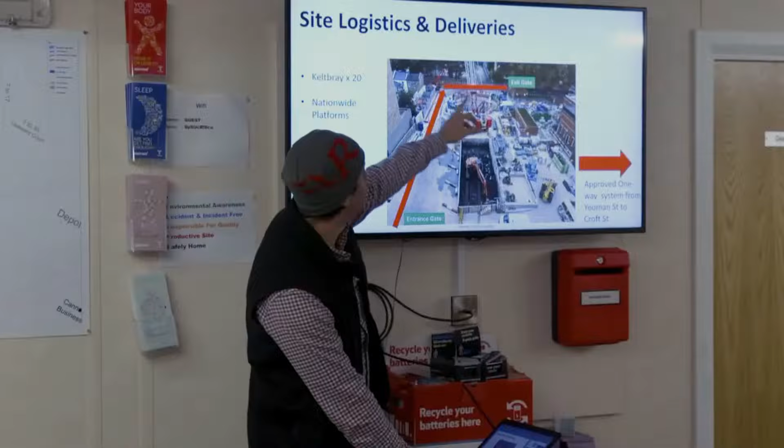Welcome to this overview of the Transforming Tunnelling Safety Group. Originally formed via interested client organisations who wanted to drive step change in the health, safety and wellbeing of the tunnelling industry. Safety standards and performance have improved considerably over the decades, but the Transforming Tunnelling Safety Group wants to help deliver a further positive shift in performance.

Free access to TTS content and resources is kindly hosted on the British Tunnelling Society's website. This video provides guidance on accessing the content, the benefits of doing so, and how you can contribute to further improve our web pages. The Transforming Tunnelling Safety Group provides safety videos, relevant health, safety and wellbeing alerts, good practice guides and proposals, as well as other useful information for the industry.

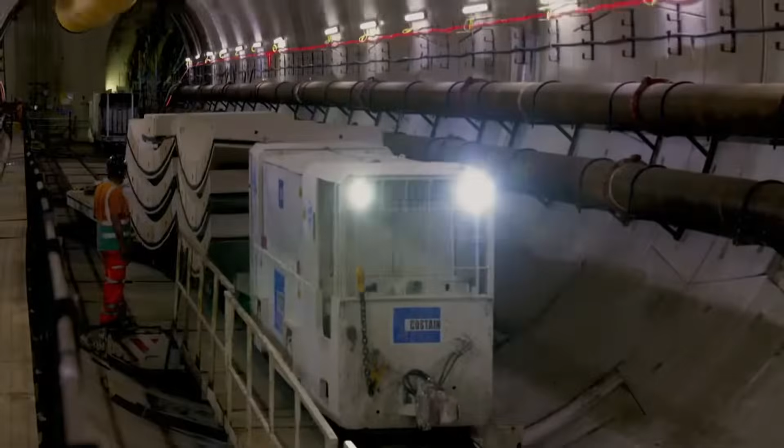This has all been supplied by previously successful tunnel projects. We really encourage members to use this content with your workforce briefings so that we can all improve health, safety and wellbeing performance. In addition, we encourage members to submit content based on your experiences, skills and lessons learned in the field. Through this collaborative way of working, we can make the tunnelling industry safer and healthier for everyone that works in it.

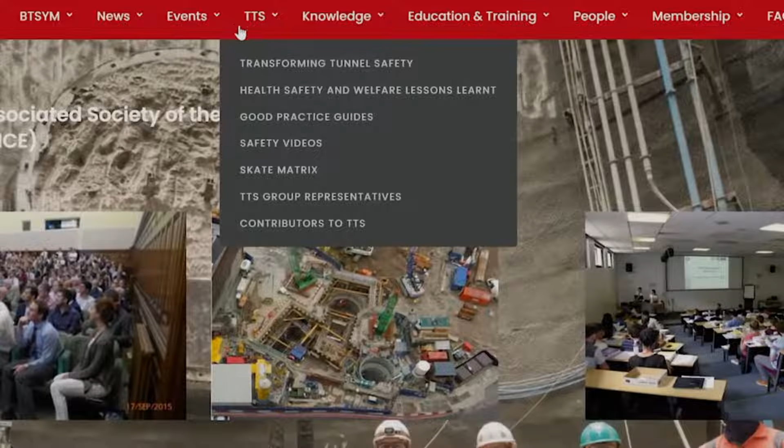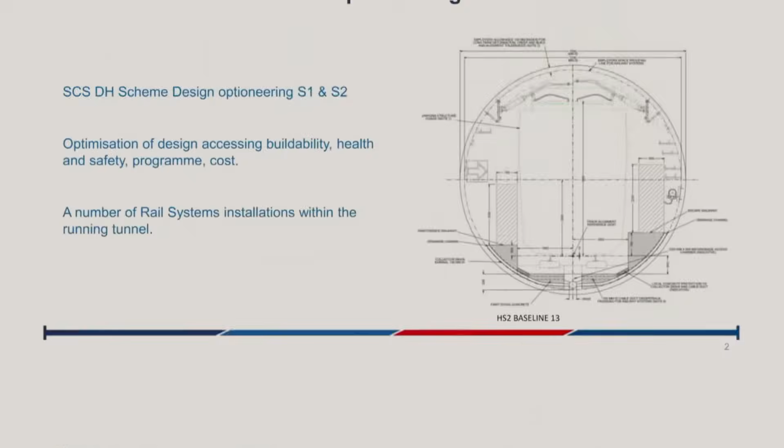Accessing the content via the British Tunnelling Society website couldn't be easier. Simply select the TTS shortcut on the homepage or the red quick links bar. From here you can access a number of resources, including real-life lessons of health, safety and wellbeing incidents, a range of good practice guides. These have been researched, developed and published by individual organisations or projects. You may find them to be useful references when planning your works. A range of safety videos, contact details for TTS representatives, and our SKATE matrix.

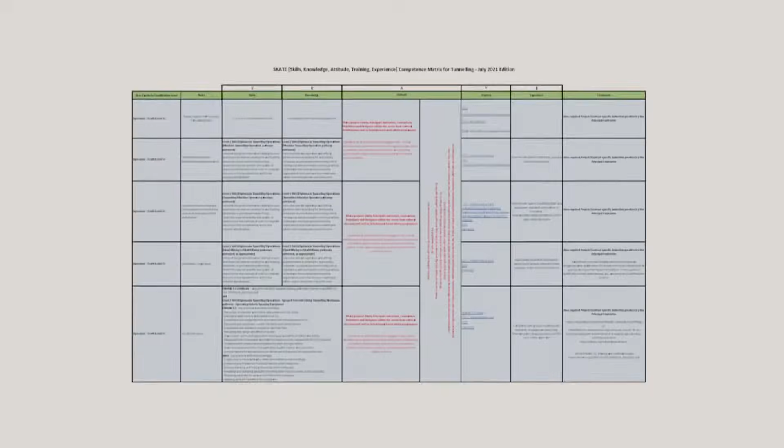The matrix was developed to be used by clients, contractors, and employers to define competence and improve safety and productivity on tunnelling projects. Updated annually with feedback and inputs from the sector, the matrix clarifies the skills, knowledge, attitude, training, and experience required for most occupations within the industry.

Videos are an excellent way of engaging the workforce. All our safety video content has been submitted to the Transforming Tunnelling Safety Group by industry-leading organisations. Considerable investment has been made to create impactful videos that cover key risks and outcomes. The video was very easy to find on the website, and when I played it to the workforce and everybody in the room, they were really engrossed in it, and you could literally hear a pin drop when we were playing it. My name's Lawrence Denman.

Watched the safety video this morning, thought it had a really good visual impact, and you're going to remember it when you go outside. We encourage everyone in the tunnelling industry to submit resources to make the website better, and you can do so via the Submit Content to TTS Here link on the homepage. All content is vetted before becoming available for members to use.

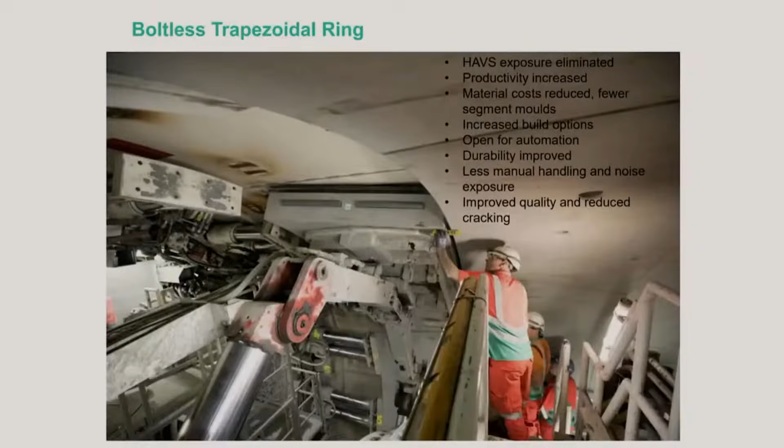And for organisations that submit content, the logos will appear in the contributors section of the website, so everyone can see who the leading organisations in the industry are. By industry members submitting content, the website will become even more relevant and beneficial.

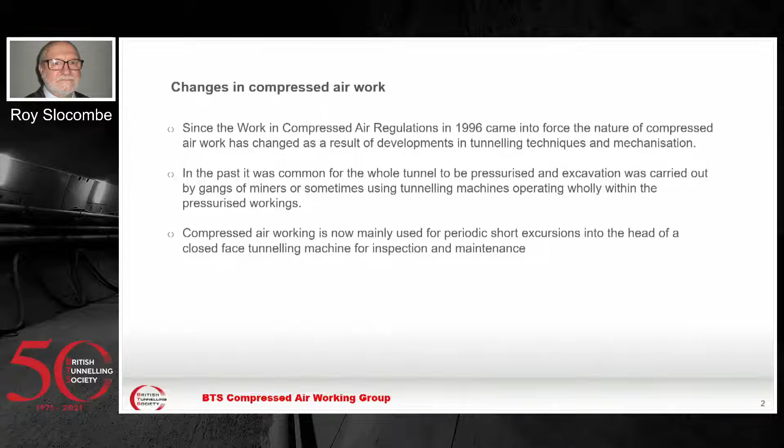The developments in machine technology over the years have also allowed tunnels to be done deeper with much higher pressures. This in turn meant that you're looking at much higher working pressures for face access, and that's led to the introduction of higher pressure working techniques developed for the offshore diving industry, including the use of non-air breathing or mixed gas mixtures rather than just natural air. That hasn't been done much as yet in the UK, but it has been done quite extensively overseas.

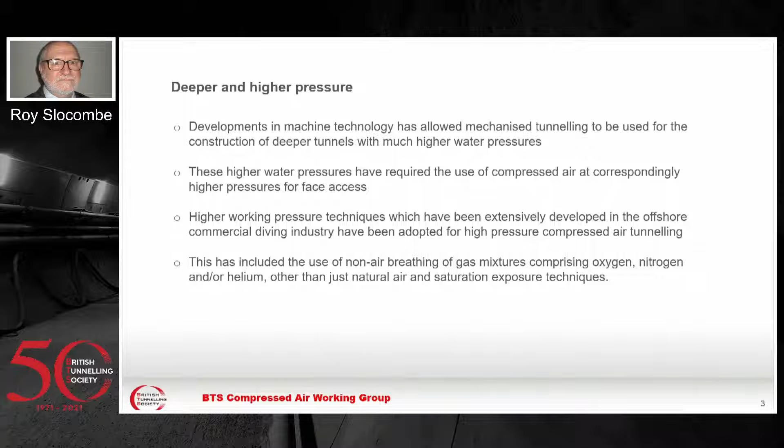That's also led to this clarification of definitions, because low pressure areas still work at low pressures that don't need a stage decompression. With current guidance, that's below 0.7 bar gauge. All the pressures we talk about are gauge pressures, because we're all sat here at 1 bar absolute now. We always talk about gauge pressures, so just pressures above atmospheric. Intermediate pressure is a definition that's now introduced, because that's work above 0.7 bar that needs a stage decompression, but is still below the 3.5 bar limit, which was the statutory limit.

It's still a statutory limit in the UK, but it's recognised that by applying for exemption, this will be forthcoming to allow work at higher pressures.

The latest version of the guidance now includes quite extensive guidance on work at pressures above 3.5 bar, which is something Donald will comment much more on. It also includes changes, because over the years there have been a number of changes within the European standards and British standards, which are referred to in the document or interface with it.

The guidance is primarily drafted for use in the UK, by the BTS, but we know it's often used elsewhere in the world, especially where there isn't or there's a lack of local regulation. That's something members of the group can be justifiably proud of, that the experience they bring to the guidance is recognised overseas.

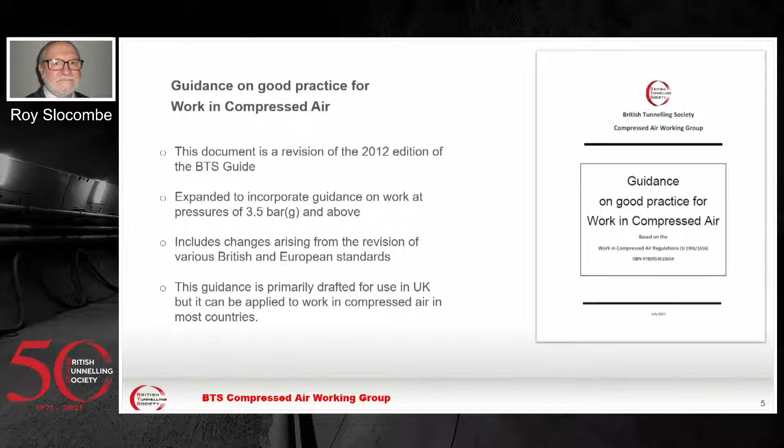Other relevant documents, these are ones that mesh together. 6164, health and safety in tunnelling, that's very relevant. The next two are mainly European standards, or the BS harmonisation thereof.

16191 covers a lot of the machinery requirements, more on the shields and the rest of the equipment. 12110 is specifically airlock safety requirements, mainly aimed at airlocks, which are an integral part of the structure of the TBM, but most of the guidance can still be applied in other situations.

The last one, the ITA Client's Guide to High Pressure Work, was prepared a couple of years ago because it was recognised that whereas most of the responsibility, if not all the responsibility, for actually using compressed air will fall to the tunnelling contractor, often it's good that the client at an early stage can anticipate the use of compressed air, and more importantly, not do anything that will then cause a problem later.

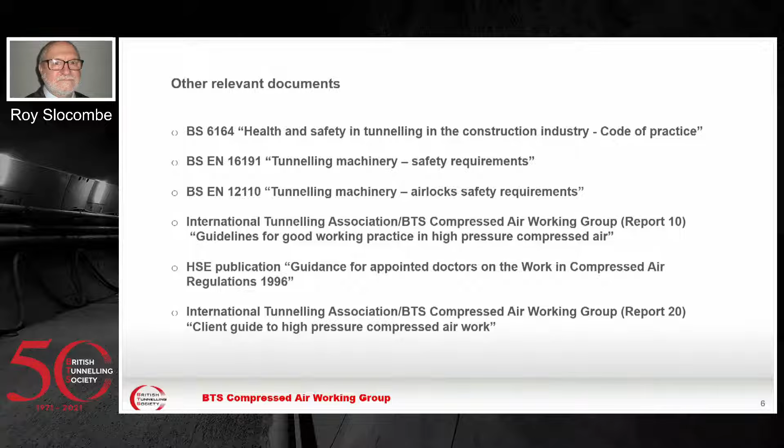12110 is being revised at the moment. Several of the changes incorporated into the compressed air guidance will also be incorporated into 12110. Once the new revision of 12110 is published, that will take precedence, but for the time being there's some interim guidance included.

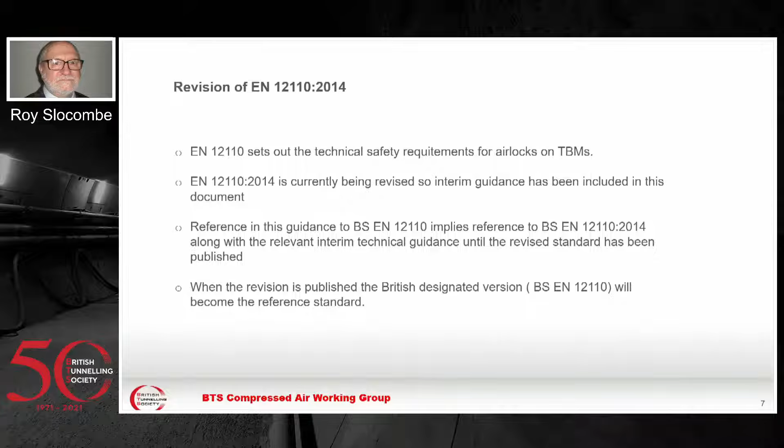As we say, that's ITA Report 10. We were very pleased that they acknowledged the input from the Compressed Air Working Group with the addition of the BTS logo on the front cover. We always think that's good. It helps to raise the international profile of the Tunnelling Society, which we think is quite good.

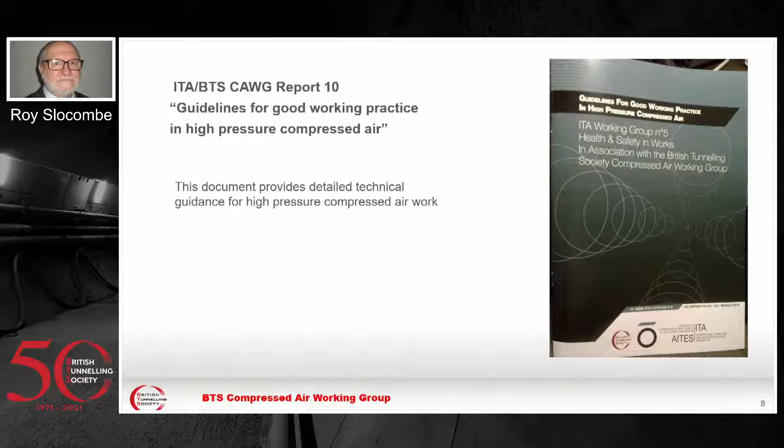Compressed air contractor - it's recognised throughout that the compressed air contractor is a bit like the principal contractor of the CDM, has the major role in pulling everything together, and has the general responsibility for the work in compressed air. They consult with the relevant specialists, which again is set out in the document, on how this guidance works in to help him with his decisions.

The one change that has happened over the years is that a few years back they actually withdrew the requirement to use approved procedures. In previous guidance, the 96 regulations, there were tables set out, and if you wanted to use a different decompression table you had to apply for an exemption. Even if you wanted to use a table which everyone agreed was more conservative and therefore better, you still had to apply for an exemption.

But they no longer want to approve procedures, and therefore it's left to the compressed air contractor in conjunction with his specialist to select appropriate procedures for decompression as part of the safe system of work. The HSE retained the requirement for an exemption for work above 3.5 bar, and that's recognition there's a lot more preparation and consideration to be given for this.

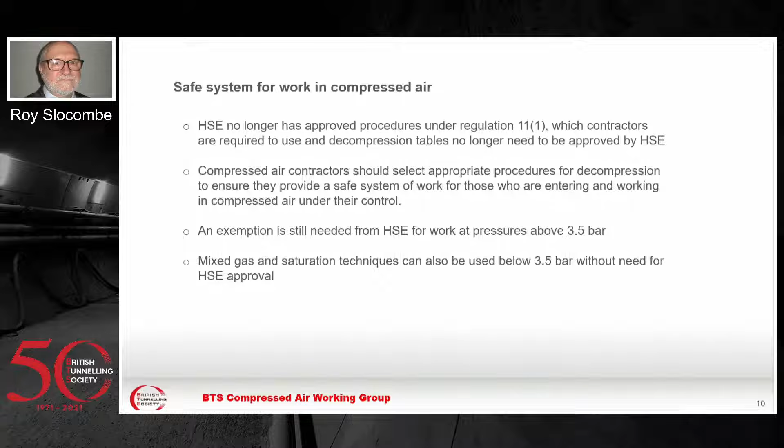Quite a number of changes with the plant and equipment, and again, although it's generally talking about airlocks on a tunnelling machine, the requirements about furnishing the locks and the equipment are equally applicable if it is a tunnel lock or a boiler lock on a bulkhead.

The one thing we did look at for consideration is the prospect of having sufficient storage of compressed air, so no matter what mayhem happens back out in the tunnel, you can still safely decompress the people. If it is a fire or anything else, you can then decompress them safely and get them into the refuge. Because at the end of it, all the guidance and requirement is aimed at safe working and looking after the safety of the guys working in compressed air.

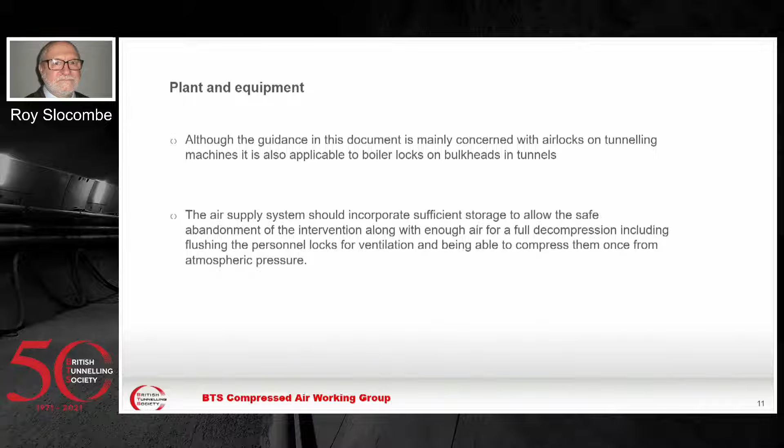The intermediate chamber, on a lot of big machines it's already there, but this is emphasising the requirement so that there's somewhere between the working chamber or excavation chamber of the machine and the airlocks. Where mixed gas is being used, there's another place where that's fed through to the working chamber, so the guys have a dirty working area to change into clean overalls before going into the airlock, especially if it's a lengthy decompression.

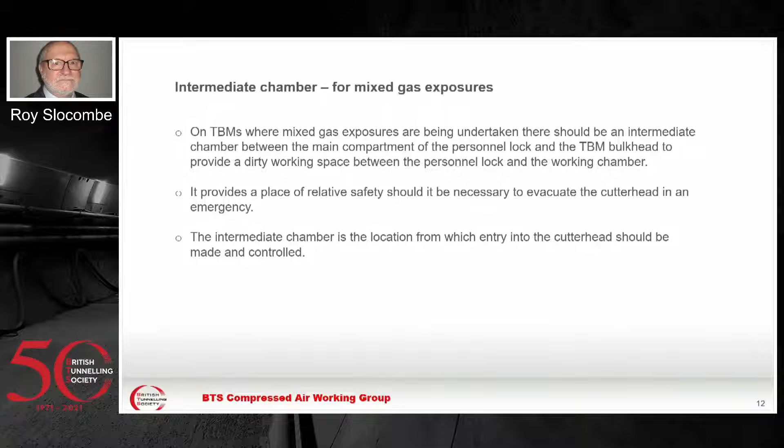Oxygen is another thing that was clarified. It had always been accepted, and in risk assessments or method statements, that if someone suffers a severe decompression illness immediately on coming out of the airlock, the practice would be to recompress them. We're clarifying here the requirement that will also be in 12110, that the whole system should be capable of working at 1.8 bar gauge, to allow a US Navy Table 6 therapeutic recompression, which seems to be a worldwide standard for therapeutic recompressions.

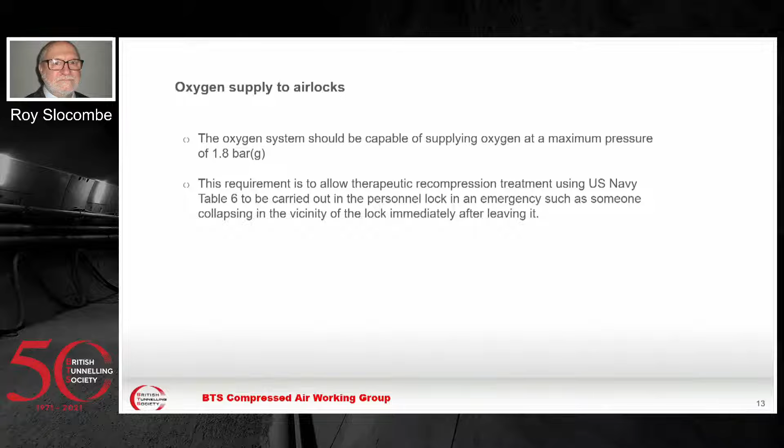Surface habitat, Donald might mention a bit more on that, this is very new because this only comes in if we are looking at saturation diving techniques, so that people are living under pressure in a surface habitat for 14 or 28 days and then making excursions under pressure to do the maintenance, rather than compressing and decompressing after every visit. It's seen as quite beneficial for working times, but also from the health and safety of the people, since they're only having one very slow decompression instead of a decompression after every visit. So when we talk about much higher pressures, this is a benefit to all concerned.

At the moment there isn't a standard, either British or European, for habitats. This is likely to be forthcoming, but in the meantime the requirements are in EN 12110 or BS 12110, and this guidance is good guidance to be followed.

Similarly, the transfer under pressure shuttles, that's something that only comes in if you're using saturation techniques. This is effectively a mobile pressure chamber that transfers the workers from the surface habitat to the working chamber on the shield.

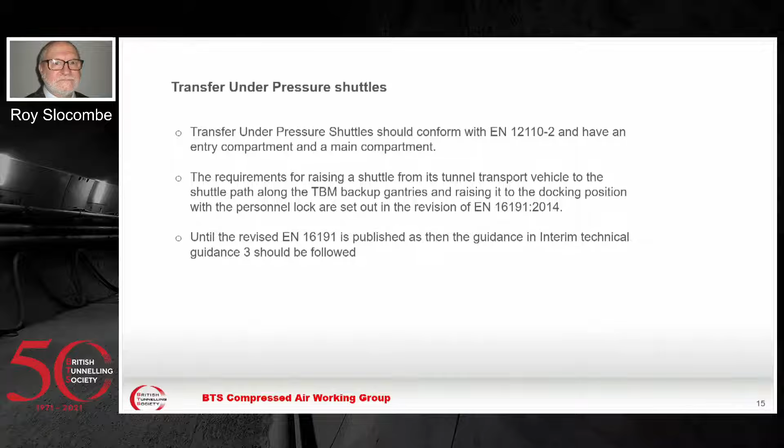Contract medical advisor, there's several changes in the document about the contract medical advisor. As it says, he's the guy who's responsible to the compressed air contractor for aspects of occupational health. There are two different roles, but very often they are covered by the same person, which is good for continuity. But the contract medical advisor and the appointed doctor aren't necessarily the same, but it's better and not unusual that they are.

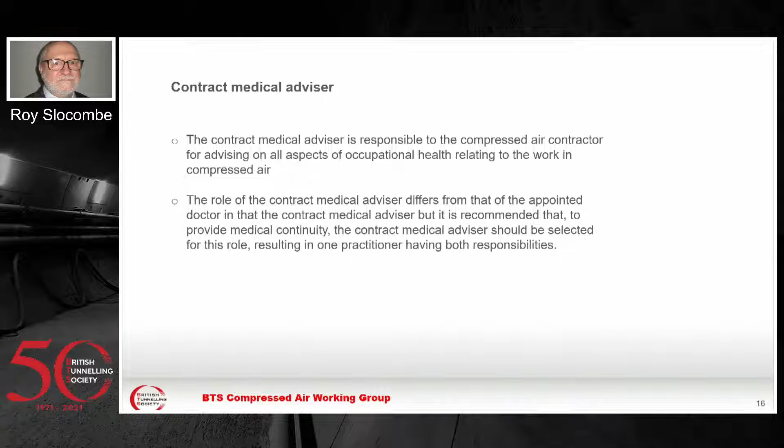Once we're into the situation where we're not relying on HSE to either specify or approve tables, then a lot more thought has to go on, particularly if we're looking at new tables. Where you're using tables with an extensive and proven history, that's one thing. If it's a new table, a lot of work can be done theoretically.

There's a lot of work done theoretically to look at the degassing of the people. Again, Donald will mention more on that. But where it is new tables, then they have to be assessed.

In the past, we'd say the incidence of DCI is not a reliable measure. In the past, when we were talking about big gangs of men working in handwork, there were a lot of statistics coming out, and the work that was done by the Newcastle Registry, the Group Secretary Tony Evans, did a lot of work on this previously. That was an indication of the effectiveness and safeness of decompression tables.

But now better techniques are coming available, and the use of Doppler monitoring, which is a way of checking for any bubbles in the bloodstream either during or post decompression, is very effective. That can demonstrate that if you aren't getting bubbles, it means the decompression table has been successful—you've been able to get the excess gas out of the tissues and not leave any to go bubbling about, and that's what can cause the problems.

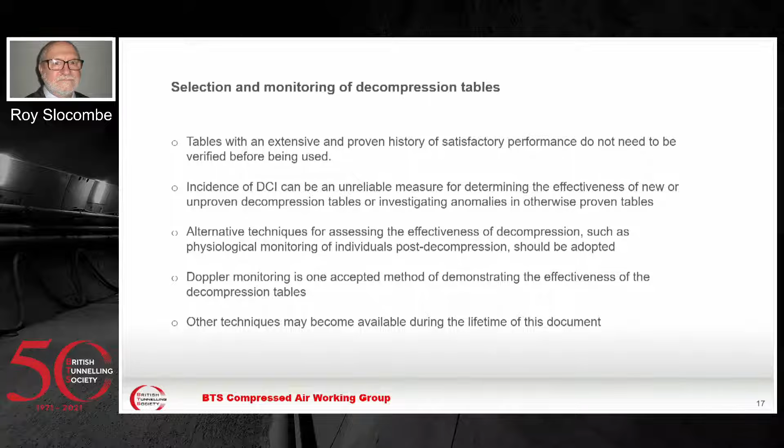It's recognisable that other techniques may become available, because the Doppler technique's now been around for a few years. If anything else does come along, then obviously there's scope to use that within this guidance.

The medical surveillance, as we say, that's still where the appointed doctor and contract medical advisor are quite important. The ongoing medical surveillance, yes, and maybe most important is the assessment of people's fitness for working in compressed air before they actually go in. Particularly as we go to higher pressures, that becomes more and more important.

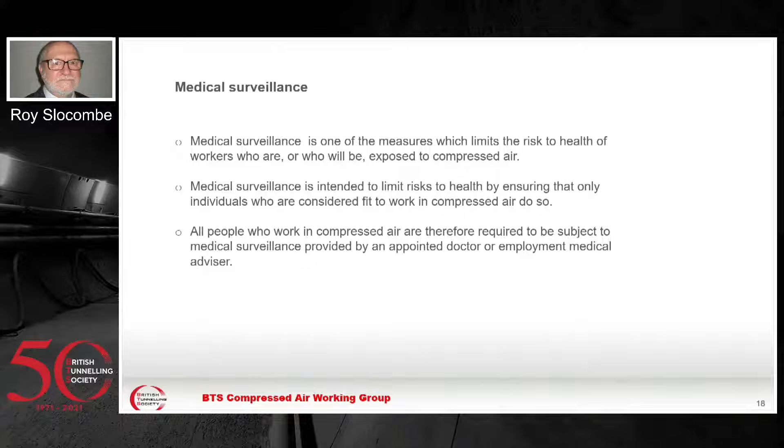Okay, at which point I'll hand you over to the main act, and he'll tell you a lot more interesting things.

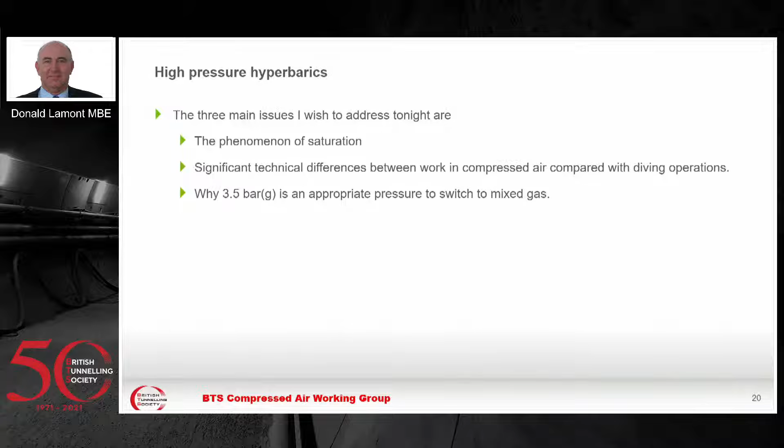Tonight, I don't want to spend time going through the content of the revised guidance or Report 10—you can read that for yourselves. I want to address three issues: the phenomenon of saturation, the technical differences between working in compressed air and diving operations—because people refer to what we do in compressed air as diving, and it's not diving, and I want to explain the differences—and I want to explain why 3.5 bar, from a physiological point of view, is a good pressure to move to mixed gas.

So we'll start off with saturation. Saturation is a natural phenomenon. How many people in the room think they've experienced saturation? One or two, fine, thank you. We'll see how many put their hands up later.

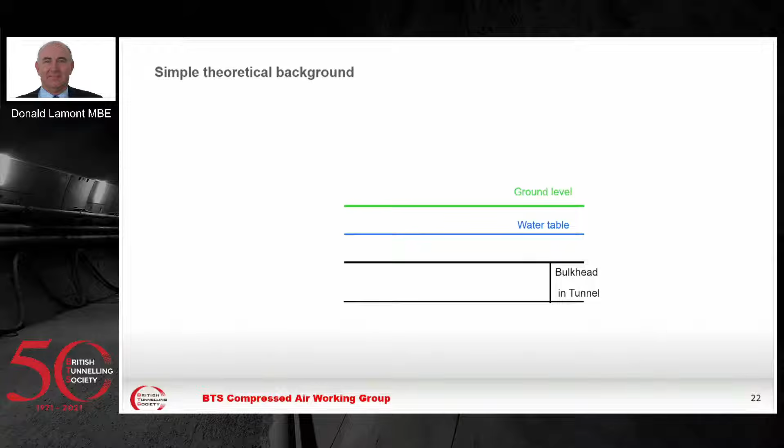This is a slide I've used many, many times to explain the theoretical background to compressed air work. It's very simple, really. You have the ground level, the green line. You have the water table, which is blue, and you have a tunnel, which is black, and somewhere in the tunnel you have a bulkhead, which separates the tunnel face from the rest of the tunnel, and that bulkhead is pressure tight. The water pressure distribution in the ground is triangular—the deeper you go, the higher the pressure.

And just for reference, 10 metres of water is roughly 1 bar of air pressure.

Roy mentioned gauge pressure. Normally in compressed air work, low and intermediate pressure, we tend not to even mention gauge, we just talk about pressure. We assume everybody realises it's gauge pressure. However, there is another pressure which is important, and the higher the pressure you're working at, the more important it becomes. Absolute pressure is what you have to start to appreciate. Absolute pressure is gauge pressure plus 1 atmosphere. Many of the gas laws that apply to high pressure compressed air work depend not on gauge pressure, but on absolute pressure. So it becomes quite important when you're stating a pressure to note if it's gauge or absolute.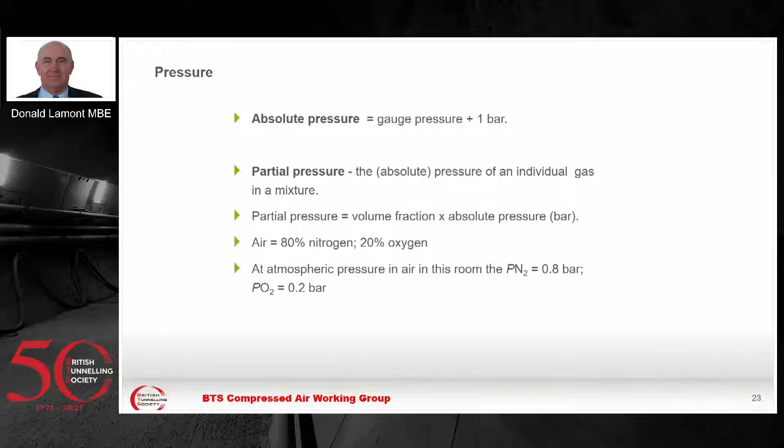Coming to saturation. Saturation is a natural state of dynamic equilibrium in which the partial pressure of the gases in the body tissues equal those that are being breathed. It's nothing to do with diving, it's not exclusive to compressed air, it's a natural physiological state.

And I say dynamic equilibrium because all the time oxygen is going into the body and being metabolized, nitrogen is going in and coming out as we sit here. So it's a dynamic equilibrium, but at the moment where we are in this room, we're experiencing the 0.2 bar oxygen, the 0.8 bar of nitrogen, partial pressure. If you increase the pressure, you introduce a state of partial saturation until saturation is re-established. If you reduce the pressure, you have supersaturation until saturation is re-established. But nature always wants the body to be in a state of saturation.

And saturation takes between half an hour and an hour to re-establish for the sort of vital organs in the body. It can take 12 to 18 hours to re-establish for tissue that's slow in diffusing, like the legs, the muscle, the fat, the bone, and so on. Once you're saturated, no more inert gas will pass into the body if you don't change the pressure or the concentration of the gases you breathe.

So what I can say with total certainty is we are all saturated in this room with oxygen at 0.2 bar and nitrogen at 0.8 bar. So we have all experienced saturation. Life is one long saturation exposure in air. Saturation is nothing to be frightened of. We are all perfectly happy, and not one of us here is a diver at the moment. So saturation has nothing to do with diving. It's a technique used in diving, but it's not only in diving.

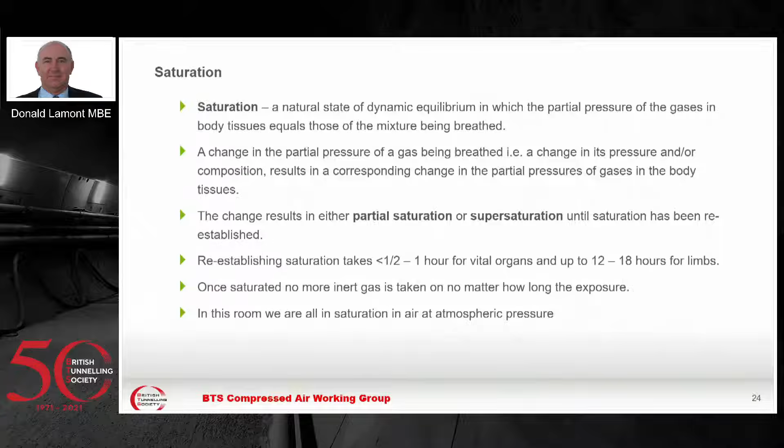There are two types of exposures in compressed air work. You have non-saturation exposures, which are short, single exposures during a shift. The compression, the working period, and the decompression all take place within a single working shift. Part of the body might be saturated, but part of the body will not be saturated because of the short duration of the exposure. In high-pressure non-saturation work, the compressed air workers breathe mixed gas by a mask from compression through the working period till partway through the decompression, when the mask can be taken off and it's safe to breathe air again.

Non-saturation exposures are limited to around a pressure of 6 bar, equivalent to 60 metres of water depth. Because of the need for decompression, your exposure is relatively short, and the productive work is probably somewhere between 3/4 of an hour, maybe up to an hour and a half, depending on the pressure you're working at. And you have one decompression per exposure.

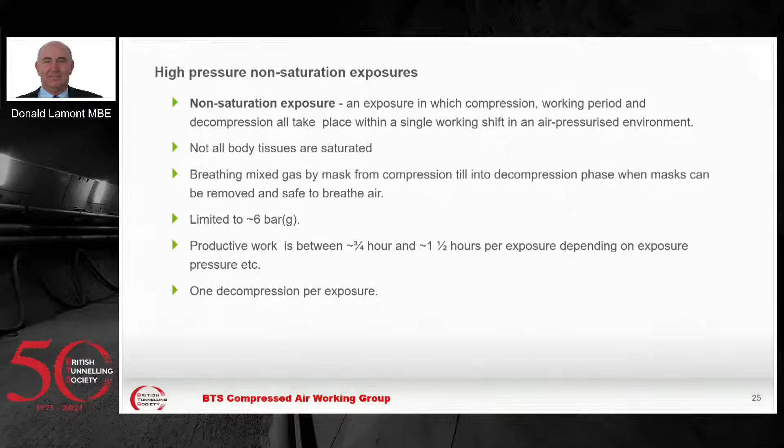On the other hand, a saturation exposure is a very different thing. You have a compression phase, you have a long period under pressure, and that can be 14, 21, up to about 24 days under pressure constantly. And then you have a long, slow decompression at the end of that, back to atmospheric pressure. A decompression can take 2, 3, 4, 5 days to undergo.

People undertaking high pressure saturation exposures breathe the mixed gas by a mask when they're in the excavation chamber and the intermediate chamber, because they are air pressurized. But when you're in the habitat or the transfer shuttle, then they are gas pressurized and a mask is not required. Repeat: once you're saturated, no further gas is taken on unless the pressure is changed or the breathing gas mixture is changed.

In saturation exposures, each day the productive work is somewhere around 5 to 6 hours, depending on conditions. So you can see the productive work is much greater in saturation work. Also, you've only one decompression every 28 days, and decompression is the high-risk activity. So saturation work is inherently more productive, probably safer, but a lot more expensive, I have to concede. That's what I want to say about saturation.

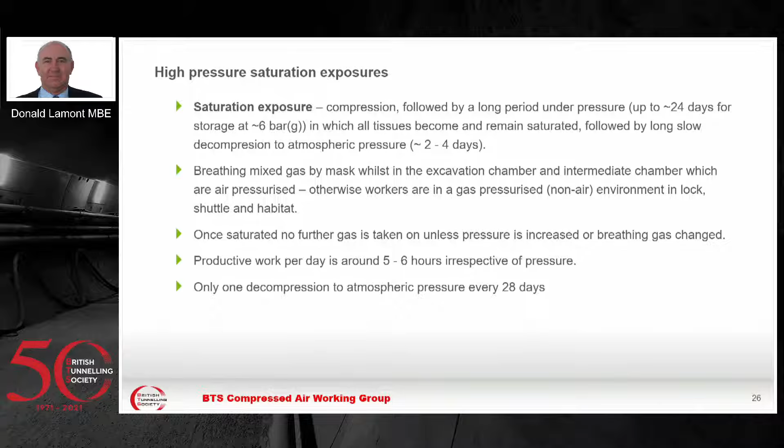Just remember, we are all experiencing saturation. The second thing I want to talk about are some of the differences between compressed air work and diving.

It is possible, although very seldom done, to put a diver into the head of a tunnel boring machine to change the cutter tools. I'm not talking about the practicalities tonight of putting a diver in compared to putting a fitter or a miner in to change the cutter tools. I want to talk about the hyperbaric differences between the two types of activity.

First is to look at buoyancy and orientation. A compressed air worker works more or less vertically, standing up, and is not buoyant because they're immersed in air. Therefore, they do considerable physical work in the course of a shift working the cutter head. The lower limbs in particular are working hard to support the weight, and this can cause fatigue in the worker. It also affects gas uptake and blood flow.

On the other hand, a diver is roughly horizontal in the water and they are buoyant. Therefore, the lower limbs are not working to the same extent as a compressed air worker, and blood drains away from the lower limbs into the upper part of the torso. So the distribution of blood in the body is quite different, and somewhere between half a litre and a litre of blood will move from the legs into the chest and abdominal cavity if a diver is working horizontally compared to a compressed air worker working vertically.

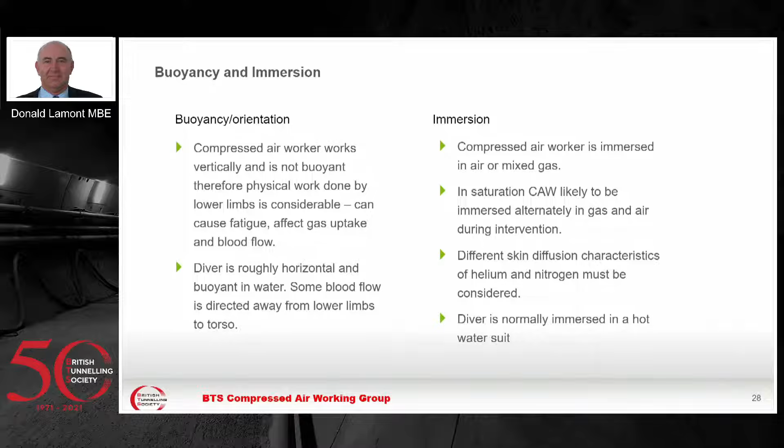There are some very significant operational differences between working in compressed air and working as a diver in a similar environment. I'm not talking about the practicalities, I'm talking about the hyperbaric differences between changing tools in a cutter head by diving or by compressed air work.

In compressed air work, the supervisor on the surface controls the pressure in the excavation chamber to ensure face stability, control water ingress, and prevent blowout. There's the problem of the imbalance between a rectangular distribution of pressure for air and a triangular distribution of water pressure. The supervisor also has to monitor the airflow to make sure the airflow into the ground is not excessive.

In low and intermediate pressure work, the people working in the chamber merely breathe the air atmosphere. For high pressure work, however, they're breathing mixed gas, and the supervisor has to control the flow of mixed gas through the umbilicals. Whether you call them compressed air workers, hyperbaric air workers, mixed gas workers, or mixed gas saturation workers, doesn't matter, just don't call them divers. That gas supply is normally around about 7 bar above ambient pressure.

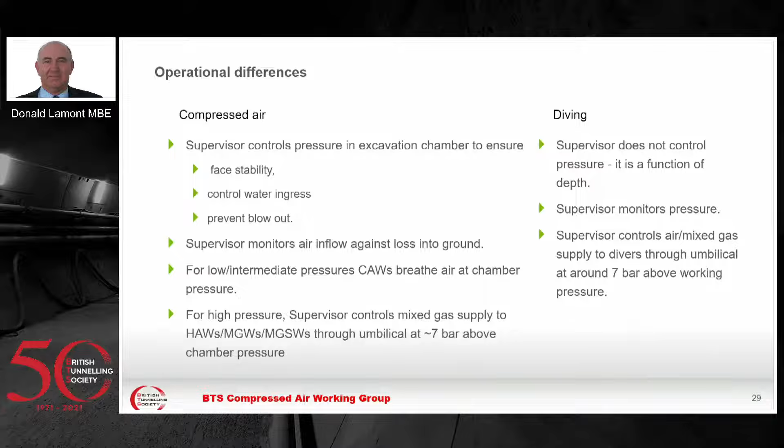On the other hand, in diving, the diving supervisor does not control the pressure. The pressure is a function of depth. You're in water, surrounded by water, so pressure is purely a function of depth. The supervisor merely monitors the pressure. Again, the supervisor does control the flow of gas. So you can see there's an operational difference between what the supervisor has to do in diving compared to tunnelling.

There are two types of work in the cutter head. We can call one an intervention. An intervention is a period of work in the cutter head, in the excavation chamber, at the same pressure as the habitat. Habitat pressure is storage pressure. So you go into the shuttle, into the airlock, into the cutter head, but you're working at the same pressure the whole way through that operation.

Val Flook, some of you know her from her work in compressed air and mathematical modelling, likened it to being the same as a free air intervention, but at an increased ambient pressure. So in an intervention, there's no difference between the pressure you're working at and the pressure you're stored at.

On the other hand, an excursion is a period of work in the excavation chamber at a different pressure to storage pressure, normally higher. Going to a lower pressure can introduce problems with a slightly higher risk of bubbles and decompression, so normally an excursion is a higher pressure than storage pressure. If you think of that as a no-stop decompression exposure, but at a higher ambient pressure, that's the nearest analogy there is.

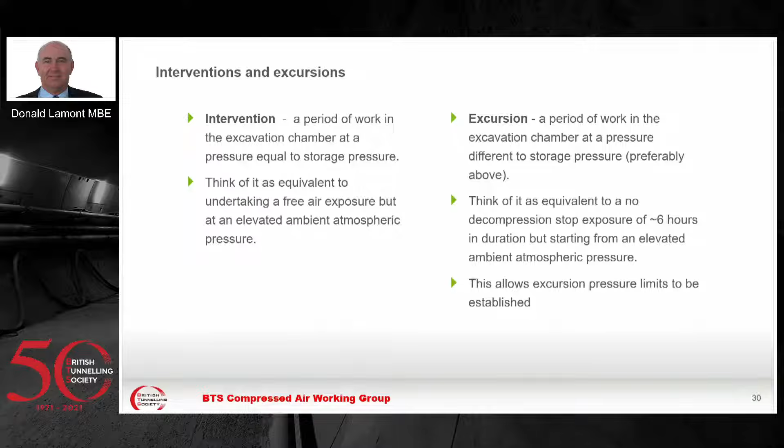There are limits on excursion pressure, and I've taken this table from the Norwegian offshore diving standard. You can see the limits on excursions are actually quite tight. If you're storing at between 3 and 4 bar gauge, your maximum pressure increase or decrease is only 0.7 bar. If you're at 4 to 5 bar, you can go to a pressure difference of 0.8, and so on.

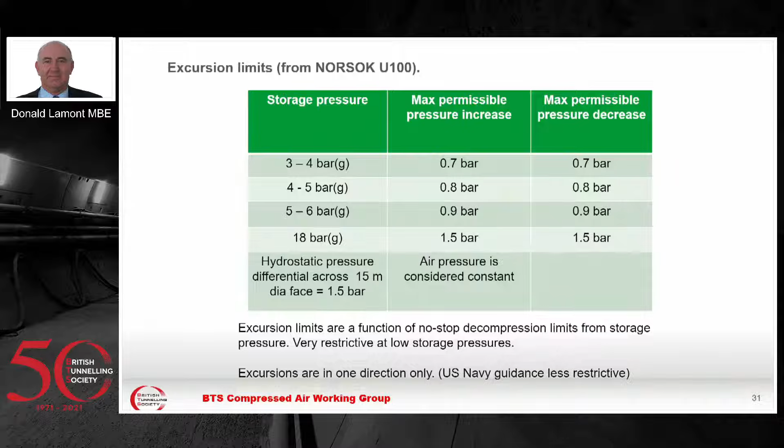Now, high pressure compressed air work has typically been used on large tunnel machines for road crossings under estuaries, where you're talking about 15 metre diameter cutter heads. You actually have to be at a pressure of 18 bar, 180 metres depth of water, before the excursion allows you to go 15 metres, or 1.5 bar, from storage pressure.

So the difference in pressure distributions makes a fundamental difference between working compressed air and diving. This really is, I think, the most important difference we should be aware of between diving and compressed air work, and why, when people talk about going into a cutter head with divers, they don't actually understand what they're talking about.

The third thing I wanted to address was why mixed gas at over 3.5 bar gauge. You hear people say, oh, we can go to 5 bar, 6 bar, 7 bar. Yes, but can you do it safely? That's a different matter.

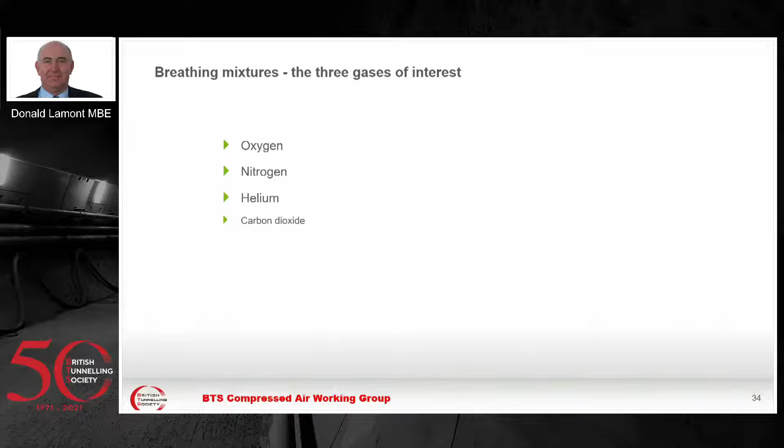There are 3 gases of interest in breathing mixtures: oxygen, nitrogen, and helium. Looking at oxygen.

Oxygen is essential for life. You must have 0.2 bar partial pressure to live. However, too much oxygen is bad for you, very bad for you. So you always need to prevent hypoxia, lack of oxygen, so your partial pressure of oxygen in any breathing mixture must always be 0.2 bar or more.

It's quite good practice to allow for a sudden loss of pressure due to a burst pipe, a blowout from the cutter head and so on. So it's good practice to work with a partial pressure of oxygen around about 0.4 bar in storage. It gives you a safety factor against something like a pipe or a hose bursting. So a normal storage pressure would be around about 0.4 bar, twice the normal pressure we have at the moment.

It's also good practice to increase the partial pressure of oxygen during the working period. Giving the workers a bit more oxygen makes them work a bit more effectively, and it reduces some of the stress on them from breathing. A partial pressure of oxygen during work of around about 0.6 to 0.8 bar is considered to be acceptable.

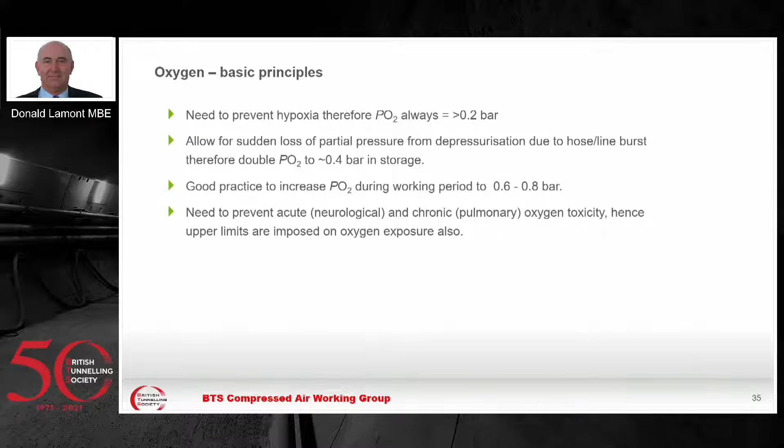However, you do need to prevent both acute oxygen toxicity, which is neurological in manifestation, and chronic oxygen toxicity, which is pulmonary in manifestation, and therefore there are upper limits on oxygen as well as lower limits.

Looking first at acute oxygen toxicity. It's the central nervous system that's affected. The symptoms are facial twitching, convulsions, muscle spasms. You get no warning, and there are no tests for susceptibility. There's significant difference between individuals and between the same individual on different occasions.

Particularly in diving, oxygen toxicity resulting in a convulsion or nausea very often means the diver, particularly a scuba diver, will spit out the mouthpiece. Once they've spat out the mouthpiece, they effectively are going to drown. So oxygen toxicity is a very serious issue in diving.

In tunnelling, a little bit, still important, but perhaps a little bit less critical than it is in diving. The upper limit on partial pressure of oxygen for non-saturation or saturation exposures is 1.4 bar. It's a conservative limit, but it derives really from the diving industry, where the consequences of oxygen toxicity are very often fatal. So the upper limit is 1.4 bar.

Roy talked about decompression illness. If you go for treatment of decompression illness, you get oxygen at 1.8 bar gauge, which is 2.8 bar absolute. It's 100% pure oxygen, therefore the partial pressure you breathe is 2.8 bar. Yes, you're at risk of an oxygen toxicity problem, but in treatment of decompression illness, you're in a chamber, there's an attendant with you, you're in a controlled environment, therefore the risk is still there, but is much less likely to be serious in consequence.

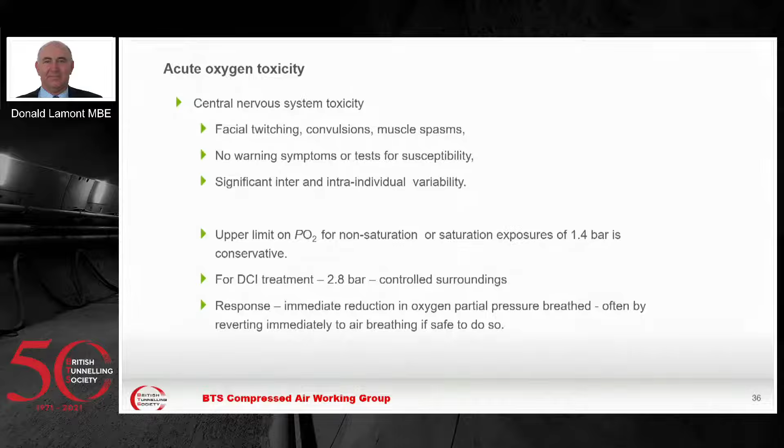There's also chronic oxygen toxicity due to long-term cumulative exposure. The symptoms are tracheitis, inflammation of the throat, the windpipe, and loss of lung vital capacity. Your lungs effectively reduce their effectiveness and reduce their working, because they don't need to work so hard, you're breathing a lot of oxygen. So again, there are limits set on long-term oxygen exposure. The limits are set in terms of OTUs, oxygen tolerance units.

They used to be called units of pulmonary toxicity dose, but people didn't like the word toxicity, so they stopped calling them UPTDs.

However, it's actually quite important to recognise that the limits set are based on pulmonary symptoms, not neurological symptoms. I did an expert witness job fairly recently where somebody was claiming neurological damage from being exposed to too high levels of oxygen long term. They were saying they'd breached the limits on oxygen tolerance units, but that limit is not on neurological symptoms, it's on pulmonary. So the limit doesn't necessarily apply from pulmonary to neurological symptoms.

The sort of limits you would apply on a daily basis are around 300 to 400 OTUs per day, and around 1800 to 2100 per week. If you work it out, 7 days at 300 breaches the very top end of the weekly limit. So the longer you're exposed, the more the limits come down. And again, going from a high oxygen mix to a lower oxygen mix is the treatment.

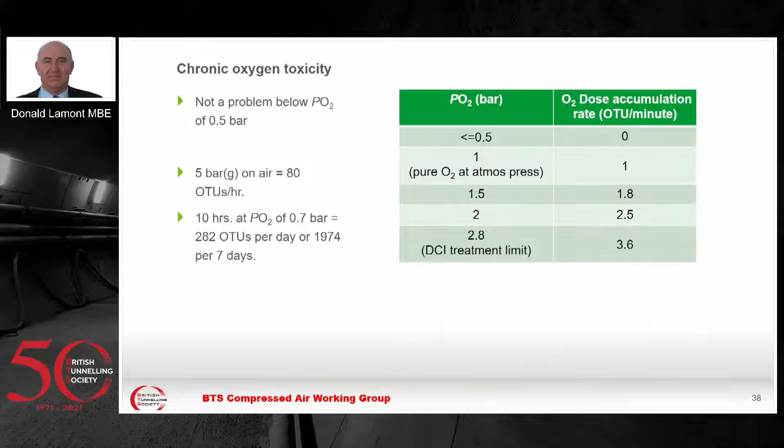The next gas which causes problems is nitrogen. Exposure to high pressure nitrogen gives you 3 different risks: nitrogen narcosis, increased work of breathing, and decompression illness, measured by Doppler score rather than number of DCI events. In actual fact, nitrogen is the determining factor in deciding when to abandon air as the breathing medium. Narcosis is a primary risk, work of breathing closely follows as a secondary risk, and decompression is not a particular problem. You can design tables to take you back from 7 bar in air, but you shouldn't be there in the first place.

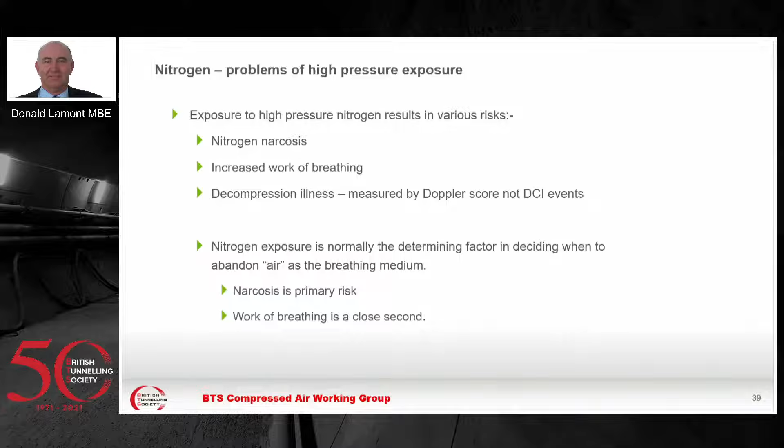Nitrogen narcosis is one of the primary problems of high partial pressure of nitrogen. The symptoms: confusion, disorientation, eventual loss of consciousness, and death.

Some people claim that you can acclimatise to high partial pressures of nitrogen, but then some people who drink 2 bottles of vodka a day claim that they're not drunk and they can acclimatise to that. You don't actually acclimatise, you develop coping strategies. You can do little bits of behavioural things, but you're either under narcosis or you're not. If you drink alcohol, you're either drunk or you're not, there's no getting away from it. You don't really acclimatise. So in terms of what's a safe level, we need to consider the symptoms.

The other thing is, these days, how many sites have a drug and alcohol policy? How many sites have a zero tolerance drug and alcohol policy? Yet we're quite happy to put people into high pressure nitrogen to cause narcosis.

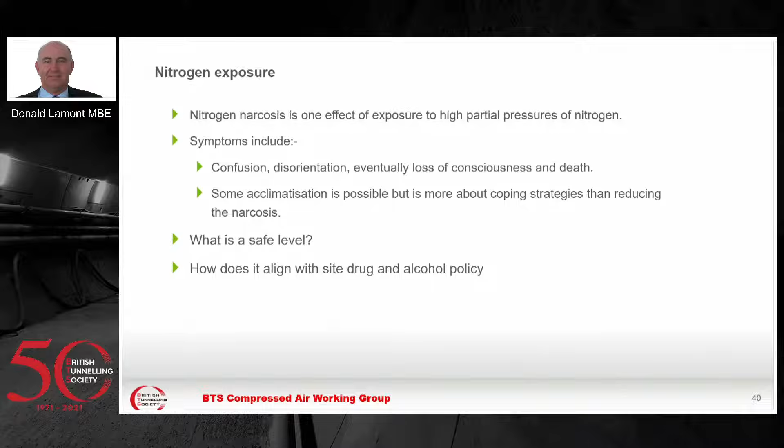There are the symptoms. Below 1 bar, no symptoms noticeable. 1 to 3 bar, performance slightly impaired, slight euphoria, and you work up to 7 to 9 bar, mental confusion, hallucinations, and over 9 bar you're probably incapacitated, unconscious, and dead.

I read a Navy report just last week, and it was talking about research into nitrogen narcosis and helium as a substitute. The diver went to 60 metres to complete the task, was unable to do so, and returned to the surface. The next day, the diver went to 60 metres on helium, completed the task, and returned to the surface. So the difference of the 2 gases is quite significant at that pressure.

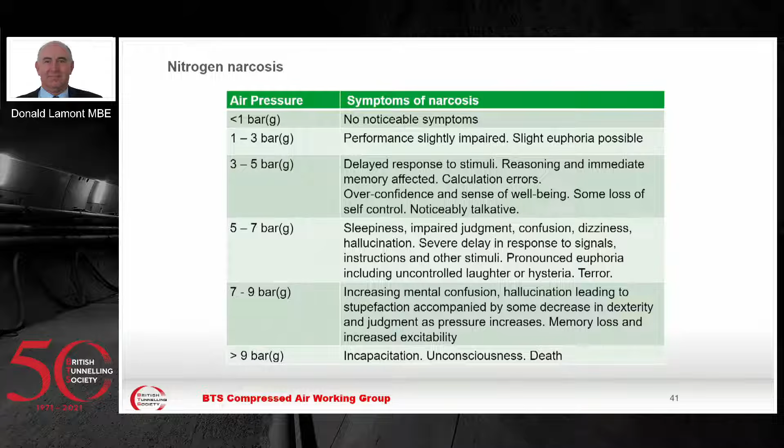We recommend in the compressed air working group that 3.5 bar is the limit that should be used on air because of nitrogen narcosis. We would be quite happy if people switched to mixed gas at around 3 bar.

We then move to helium. It's an expensive, low-density, non-narcotic inert gas with a high thermal conductivity. It's used to dilute the nitrogen and oxygen and keep the partial pressure of both gases within required limits. Helium, because it's low-density, makes breathing easier, and hence there's less carbon dioxide retention.

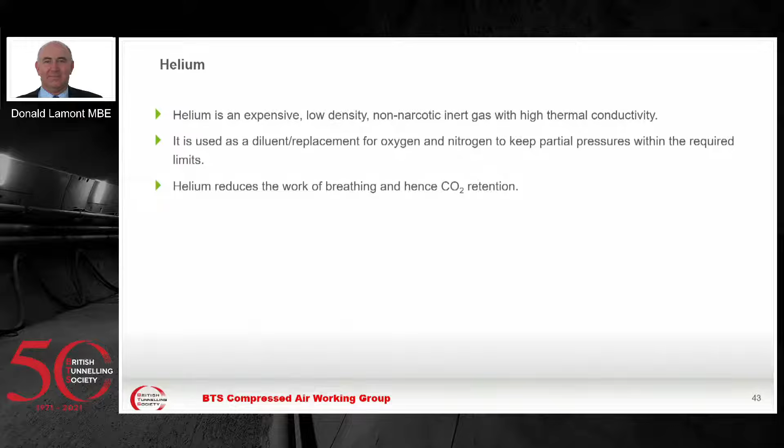There's a problem at high pressure. Above around 15 bar, helium can result in high pressure nervous syndrome, which is a bit of a shake or tremor. But that problem doesn't really occur in tunnelling, so at the moment we don't go to these sort of pressures.

Because of the cost of helium, you tend to want to start looking at helium reclaim, where you reclaim the helium from the exhaled gas. Helium is a commodity traded on commodity markets. At the moment it costs about £35 per cubic metre at atmospheric pressure. You breathe 40 litres a minute, so about every 20 minutes or so you're breathing 35 pounds worth of helium if you're doing it at atmospheric pressure.

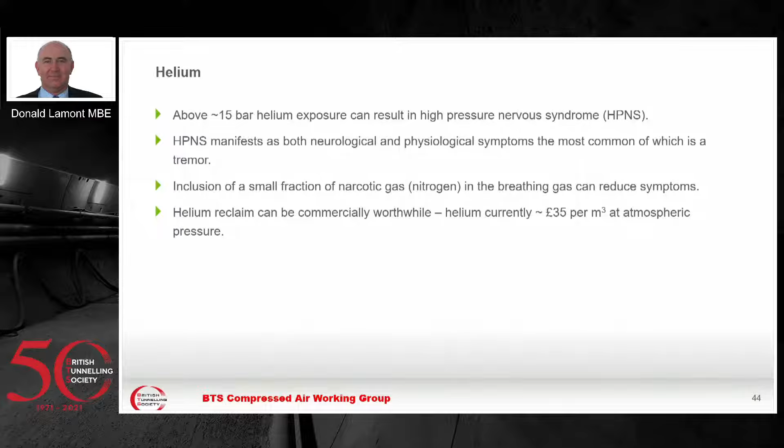The fourth gas I want to talk about, and that slide before was deliberate when I talked about 3 gases in breathing mixtures - carbon dioxide is a gas that's not often spoken about. It is always present. It's a narcotic gas, it's denser than air, and it has anaesthetic properties.

CO2 in the arterial blood is linked to the rate of breathing, but when you get to higher pressures of nitrogen, the links can be disrupted. There are very complex physiological reactions in the lungs between the oxygen transfer in and the CO2 transfer out.

CO2 is known to exacerbate the effects of nitrogen narcosis. It exacerbates the toxic effects of oxygen, and also, according to the US Navy Diving Manual, it increases the risk of decompression illness.

Now, I can remember people in this room talking about decompression illness in jobs in the past. The late John Bellman used to be a great advocate of the philosophy that carbon dioxide was a factor in increasing decompression illness. In my PhD work I looked at the problem, could find no evidence for it, but the US Navy Diving Manual does actually link decompression illness to high levels of CO2.

The symptoms become apparent round about 3.5 bar in air - the symptoms of excess carbon dioxide exposure. And you really want to, if you're in a chamber or an airlock, maintain the carbon dioxide levels round about the same level as they would be in this room at the moment.

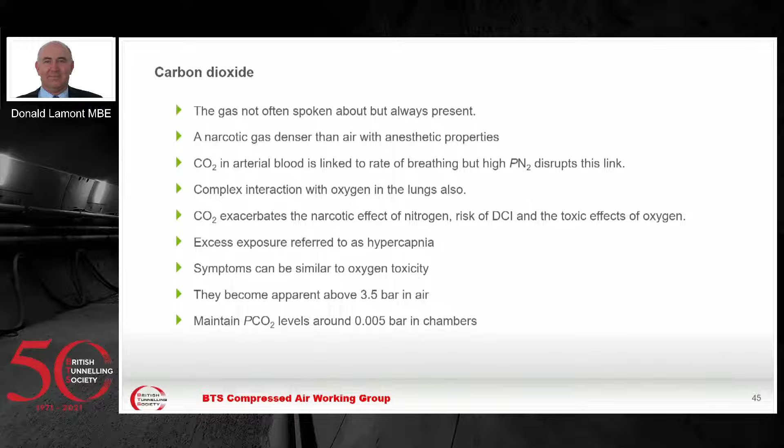Carbon dioxide arises from two sources: from the inspired gas, and also internally as the waste products from human metabolism. We all generate our own carbon dioxide.

The more you work at breathing, the more you produce carbon dioxide. And the more that reduces the tidal volume, the volume of the lungs breathe in and breathe out, hence the more carbon dioxide you're producing, the less carbon dioxide you're flushing out of your lungs. Also, you've reduced lung function due to high oxygen partial pressures - that also can lead to carbon dioxide retention. So carbon dioxide is actually quite important in ensuring the health of the worker.

If you have a chamber, then people are not wearing masks - they exhale into the chamber atmosphere. You either have to flush the carbon dioxide out by ventilation, or you scrub it out using a chemical scrubber.

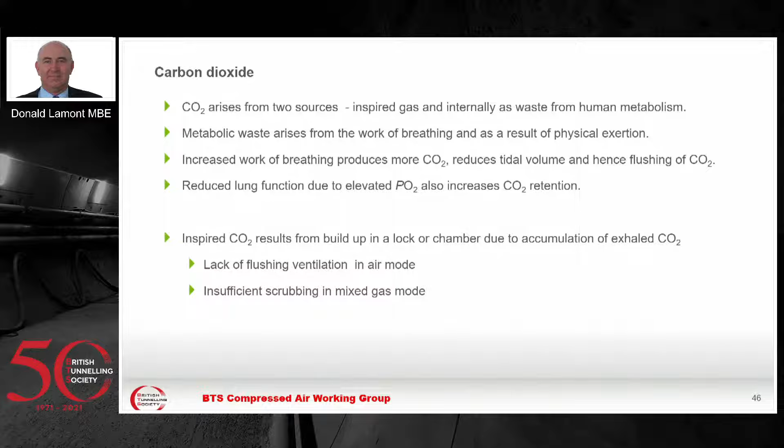Just want to talk a little bit about work of breathing. Nitrogen is a heavy, dense gas. As you increase the partial pressure, the mass density of nitrogen increases directly with pressure. Double the pressure, you double the weight of nitrogen you're breathing in and out. Hence the lungs have to work much harder to inhale and exhale that greater weight of gas with each breath.

And the work of breathing leads to fatigue. And because you're tired, you don't breathe as deeply, therefore again you're not flushing your lungs as much as you should do, and that leads to carbon dioxide buildup.

Just to give you an indication, the density of oxygen is around 1.3 grams per litre, nitrogen is about 1.16, helium is only 0.17 grams per litre - so it's much less dense than nitrogen. At 3.5 bar pressure, the density of air is around about 5.5 grams per litre, whereas if you're using a 20-80 heliox mix rather than an oxygen-nitrogen mix, you'd only be breathing a gas weighing 1.8 grams per litre. So there's a big difference in the weight.

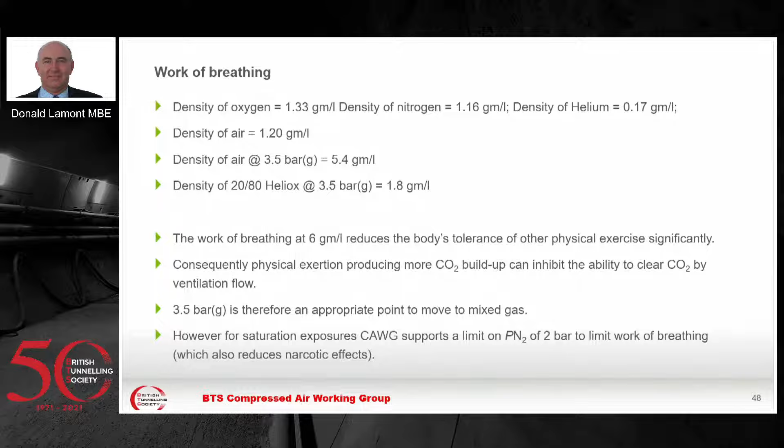Research has shown that when the weight of gas you're breathing exceeds about 6 grams per litre, the body is spending so much effort moving gas that it cannot tolerate additional carbon dioxide being generated from exercise. You end up with high concentrations of carbon dioxide, which can lead to physical and medical problems. So again, 3.5 is an appropriate pressure to move to mixed gas in terms of work of breathing. If you're working in saturation, a maximum partial pressure of 2 bar is probably all that people can tolerate long term.

Just finally, looking at decompression and other bits and pieces. For a non-saturation exposure, I've taken the longest exposure at the highest pressure in the Blackpool tables, and decompression from an exposure of 4.25 hours at 3.5 bar gauge takes 355 minutes from the Blackpool tables - that's the top graph. There are companies who exist who will happily say they can decompress from 6 bar and 7 bar, and they can. But they can't counter the work of breathing, and they can't counter the nitrogen narcosis at these pressures.

The bottom graph is a saturation decompression. Again, it's from 3.5 bar storage pressure, and that takes just over 2.5 days. You can see there that the top graph is a much more aggressive decompression than the bottom graph, and they're both from the same pressure.

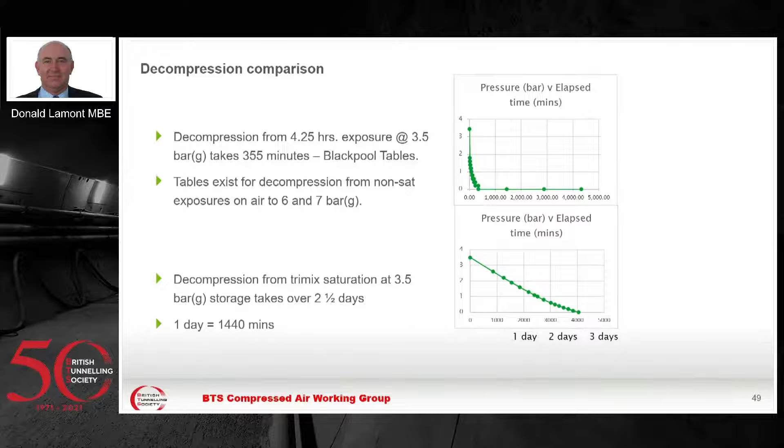Decompression from saturation is done as a long, slow, linear pressure change, typically round about 0.1 to 0.15 bar per hour. Some tables suspend the pressure change overnight - there's a 6-hour window overnight when there's no change in pressure.

Depending on the gas you're breathing, whether it's helium, nitrogen, or a mixture of both, you're ideally trying to eliminate them without forming any bubbles whatsoever. Stage decompression from non-sat exposures - you reduce the pressure quite rapidly, you form bubbles, you flush them out. You drop the pressure, you form bubbles, you flush them out. In saturation decompression, the intention is not to form bubbles at all, so you never have to flush them out - they merely diffuse away in the background.

Excess oxygen is never a problem because you metabolize it out. Any bubble of oxygen in your system, you'll metabolize through normal metabolic processes.

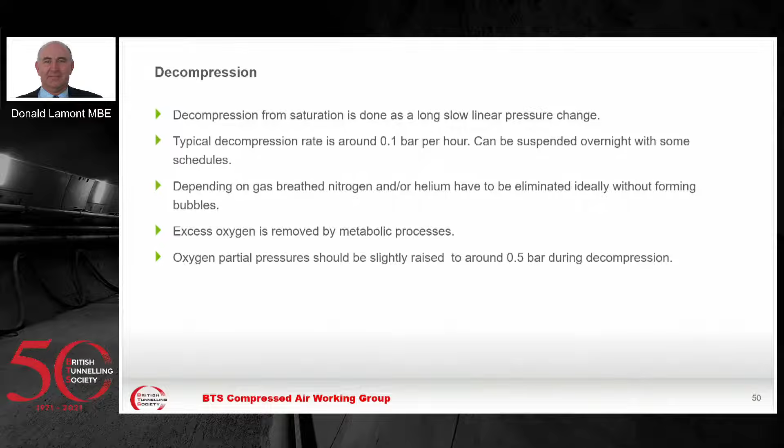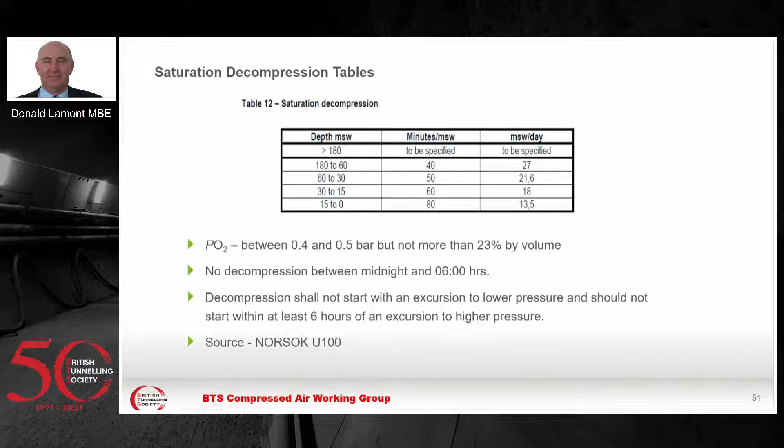As I said, no decompression normally happens between midnight and 6 in the morning. The other thing most decompression tables require is that before you start a decompression, you have a period of storage pressure - you don't have an excursion. If you're doing an excursion, you must come back, and then depending on which tables you're looking at, have a period of 6, 8, 10, or 12 hours back in storage before you start the decompression to stabilise the blood and the gas in the blood. Again, this table is taken from the Norwegian standard.

Just looking very briefly at decompression illness, non-saturation air exposures with the worst combination of pressure and time probably give you around 2.5% of exposures resulting in decompression illness. Because saturation decompression is relatively benign, your level of decompression illness is very much lower. It's very rare during saturation decompression to have a problem with decompression illness.

I've talked about breathing mixtures - what do I actually mean by that? The one that's established itself as more popular in tunnelling is trimix. The one used in diving is heliox. Trimix is an oxygen, helium, nitrogen mixture. It reduces your narcotic risk, reduces the work of breathing, and is relatively cheap compared to heliox because you've got nitrogen as well as helium in the mix.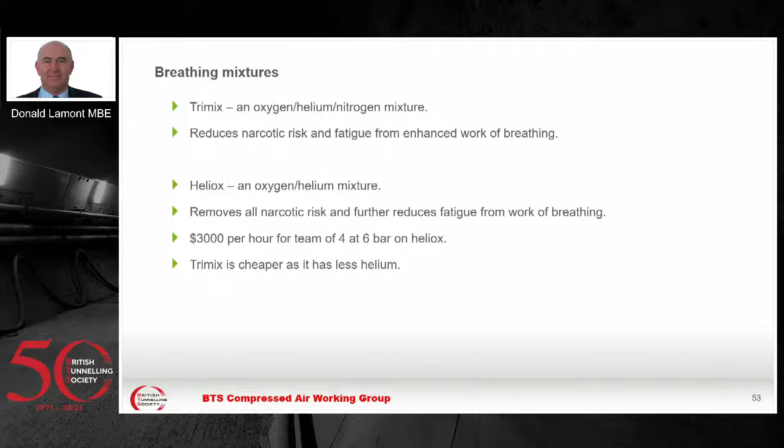Hence the reason for helium reclaim. So trimix is cheaper because there's less helium in it. For non-saturation exposures, you require a high oxygen mix because you start off at atmospheric pressure, and you need the 0.2 bar partial pressure of oxygen. You can go up to 6 bar non-saturation.

A single mix, a 20,30,50 oxygen, helium, nitrogen mix, can be used over that entire pressure range. The 20% oxygen gives you a partial pressure of 0.2 bar at atmospheric pressure, and 1.4 bar at 6 bar pressure. The nitrogen is on the limit again, and the helium is just an inert diluent. Instead of a 20,30,50, a 20,40,40 has been used in the UK on one or two occasions, and that's a slightly more benign gas - more helium, less work of breathing - or you can use a heliox 2080 as an alternative.

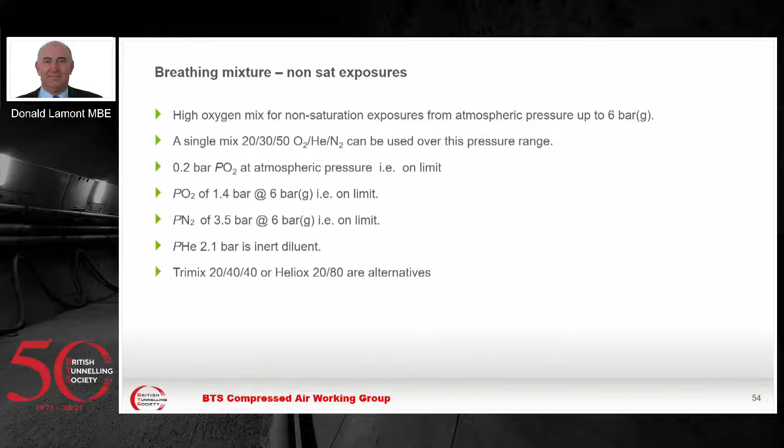Going to saturation mixes: they have to be low oxygen because of the high pressures you use them at, so you keep the partial pressure of oxygen down. These saturation mixes are not respirable at atmospheric pressure - there's not enough oxygen in them. If you're storing at 6 bar pressure, a typical trimix might be 6% oxygen, 65% helium, 29% nitrogen, giving a partial pressure of oxygen of 0.4 bar and keeping nitrogen around 2 bar for long-term use. When you go to work, again at 6 bar, you'd increase the oxygen slightly, so a 10,61,29 mix gives a higher oxygen partial pressure but still keeps nitrogen at 2 bar. Or you could use a 1090 heliox and pay the extra.

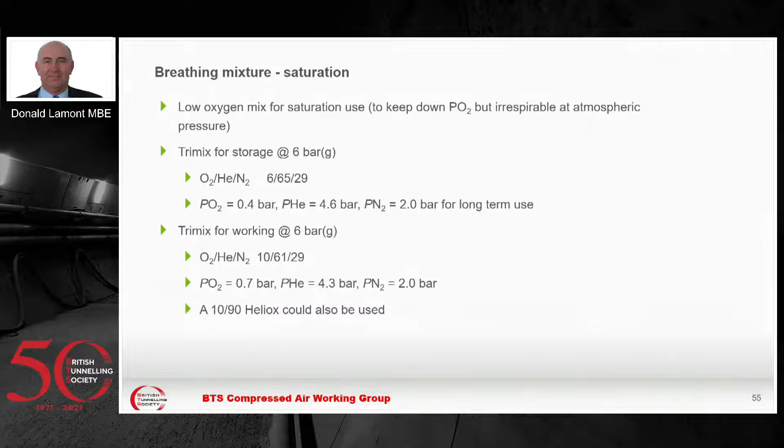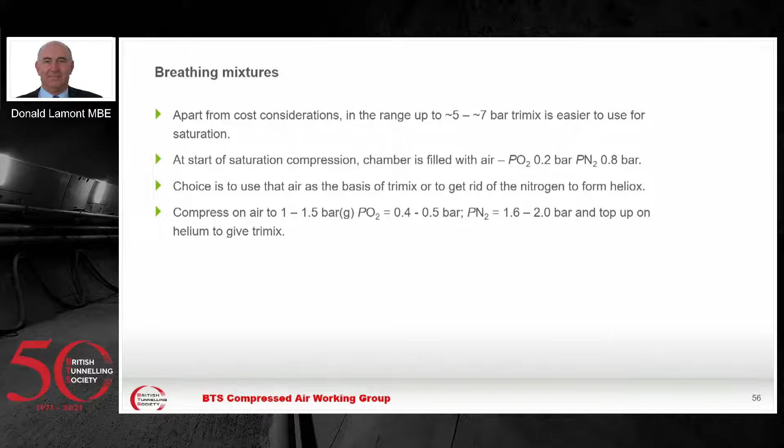Another consideration between heliox and trimix is that trimix is actually quite easy to mix. You start off in the living habitat, filled with air, so you already have a partial pressure of oxygen of 0.2 and nitrogen of 0.8. If you compress the air slightly, you can boost the oxygen partial pressure to 0.4, doubling the nitrogen partial pressure to just under 2 bar - a reasonable long-term limit. You can then compress in helium to reach your final pressure. So you're making use of the air already in the chamber, using it for cheap compression, and saving on helium costs. That's why helium trimix is a good choice.

A bespoke mix is possible for every situation really. I was involved in work in Hong Kong where we had a pressure range from 3.5 to 6 bar, and we had 20 different mixes to cover that range - so whatever pressure they were at, there was a mix to suit that situation.

The other thing is quality control. It's extremely important to check the gas on receipt from the supplier, to check it before you start to use it, and to check it before it goes down the hose to the person breathing it. So you have continuous analysis to make sure the right partial pressure of oxygen and other gases is fed down to the person doing the work.

Finally, fire. Fire, as we all know, is a major issue in hyperbaric work. Increased oxygen in compressed air increases the fire risk, so the oxygen concentration should always be kept below 23% by volume. That becomes a problem in decompression from saturation around 1.2 bar downwards, when trying to keep the partial pressure of oxygen high for physiological reasons conflicts with not wanting it too high for fire safety reasons.

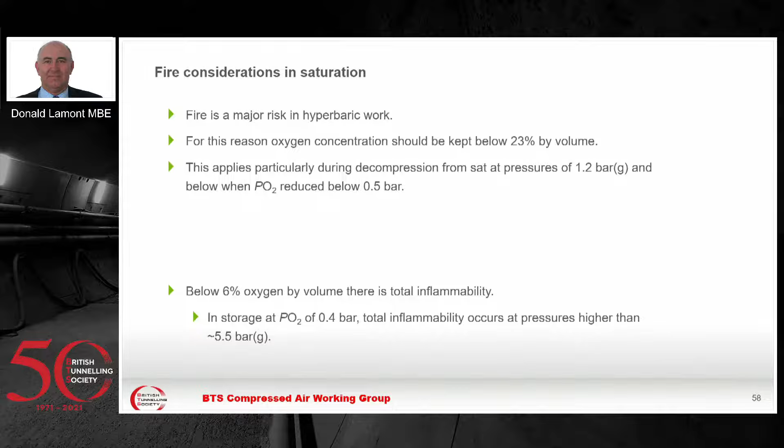Just to point out, once you go below 6% oxygen in the mix, you have total inflammability - nothing will burn. So once you're working at pressures around 6, 7, 8 bar, the environment in the chamber is totally non-flammable. However, you have to come back down, back to reality, to the flammable atmosphere at lower pressures. But there is a situation where the people in the chamber have total inflammability.

So finally, I hope I've explained that saturation is not specific to diving and it's not something to be afraid of. I asked before how many people had experienced saturation - I ask again, how many people now believe they've experienced saturation? At least I've achieved something. Thank you. I hope I've also explained some of the difference between high pressure work in compressed air and diving. The differences are purely in terms of hyperbarics - there are other practical issues we don't go into, but in hyperbaric terms there are big differences, the excursion versus intervention, between high pressure work in compressed air and diving.

So from now on, we don't talk about diving and tunnelling, we talk about compressed air work and tunnelling. And I hope I've explained why 3.5 bar is an appropriate pressure to change to mixed gas. Don't believe what people who work in China and practice in Europe say about doing 5, 6, 7 bar in air, because you cannot get away from the problems of CO2 retention, work of breathing and narcosis. I hope you now have a bit of an understanding of the complexity of mixed gas work and the different gases involved. So thank you.

Well done on that. Two quick questions. One linked to oxygen toxicity and UPTD. When you were explaining the limits, you looked at the limits gathered during exposure time, looking at exposures on air at higher pressures and the values they were generating. What you didn't add was that decompression also has to be factored in, so you'd in fact lower your limit by having to decompress, usually using oxygen as well, which is quite an important part of the concept. So although the exposure value is high, you can't give the full exposure value in working exposure - you've got to allow for the decompression.

And the last bit, right at the end, you looked at saturation exposures and establishing a partial pressure of oxygen, then maintaining the balance with helium. All helium mixes are a minimum of 2% now, so you have to allow for that addition as well. Up to about 1990, you could use pure helium for that, but the balance now is with 2%. The diving helium is 98/2.

Tunnelling helium might be different to diving helium.

No, but I didn't want to go into that, the time was a bit limited. I didn't want to explain that if you top up helium, you will get extra oxygen, but then if you don't use metabolic makeup, you will eventually breathe that extra oxygen back down to a partial pressure that you can use.

As a reminder, many of you that have been joining us online over the last year - we introduced to you as part of the BTS's 50th anniversary year, we organised and arranged a series of tunnelling songs that are bespoke to our tunnelling industry. So please check them out. Nancy Kerr, a well-known folk singer, created these songs with us, particularly taking inspiration from the BTS 50th anniversary book. Please take a listen.

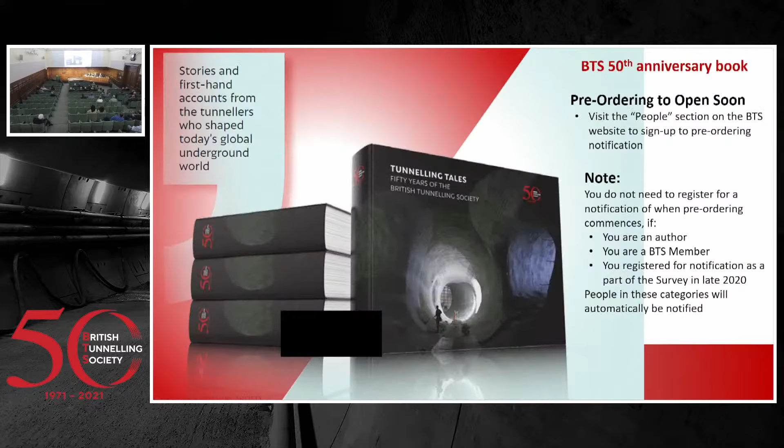I know from comments and things I've had, they've actually helped inspire and remind many memories of people that have worked in this industry. So please check them out, and hopefully in the future we might even get to play them in here.